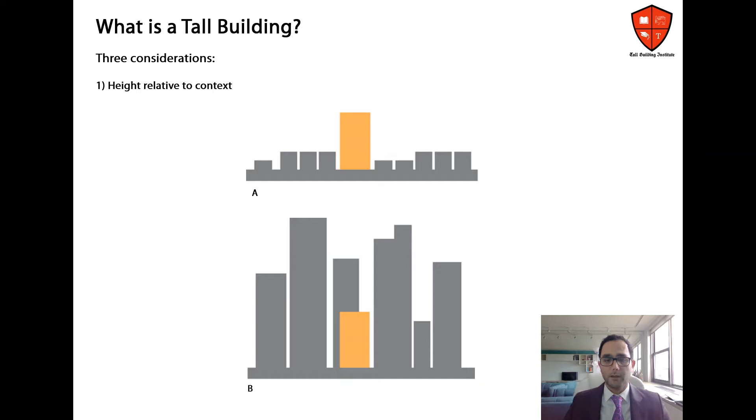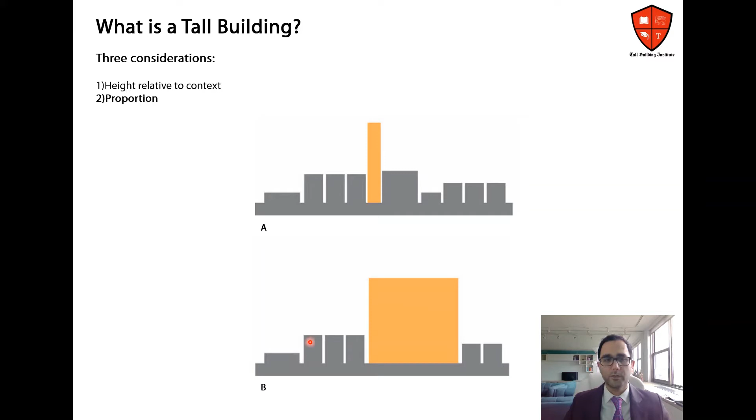The second is proportion. When you have a city like A, you look at the proportion of other buildings compared to your building - that's considered a tall building. Also in scenario B, when you look at the proportion of other buildings compared to your building, that's not considered a tall building.

The third one is tall building technologies - where you have new technologies, high speed elevators, or a new structural system, where technology has been adapted for that tall building.

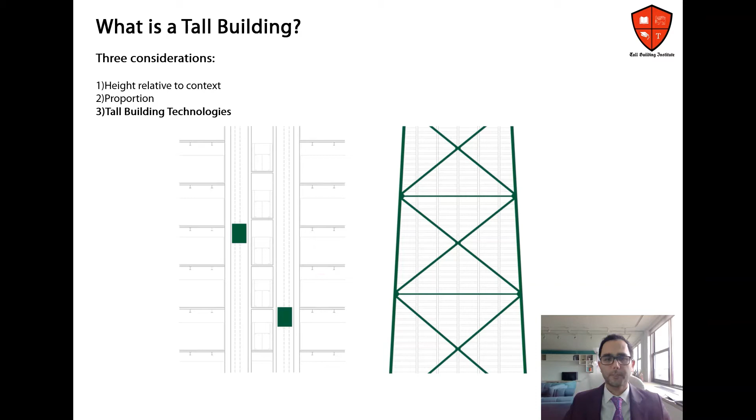Then we go to the higher level: what is a super tall building? I'm sure some of you may have heard people use different names and terminologies - tall buildings, super tall buildings, skyscrapers. Opinions on this differ internationally, although great heights are now being achieved with built tall buildings in excess of 800 meters or 2,600 feet.

At the start of 2010, there were only 42 buildings in excess of 300 meters completed and occupied globally. But now we have much more. As we move into the future, new technologies are achieving greater and greater heights.

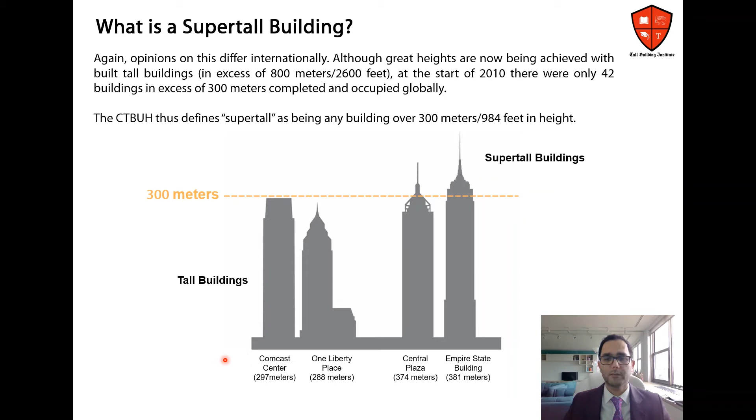Those are in New York City. The current tallest 10 buildings in the world, as of January 2022 - this data is from CTBUH again. As we see, the Burj Khalifa in Dubai is the tallest one at 828 meters, and also we have Taipei 101 in Taipei at 508 meters.

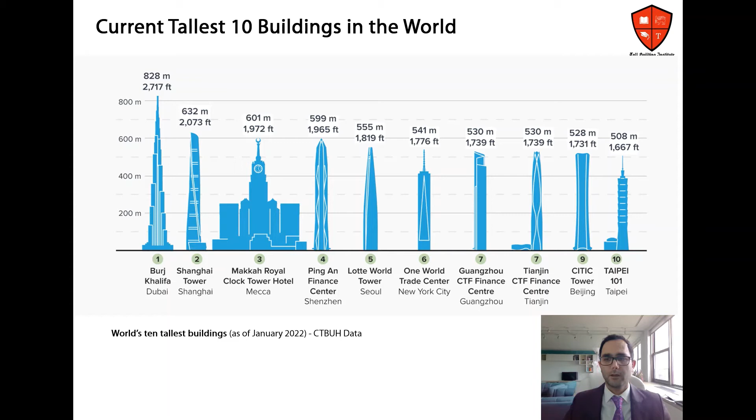Then we have different considerations for how to measure the height. One of them is height to architectural top. This is measured from the level of the lowest significant open air pedestrian entrance to the architectural top of the building, including the spire, but not including antenna, signage, flagpoles, or other functional technical equipment. This measurement is the most widely utilized and is employed by CTBUH to rank the world's tallest buildings.

As you can see here, again we look at the world's 10 tallest buildings, and Burj Khalifa, which is still the tallest one in the world - the architectural top height is 828 meters.

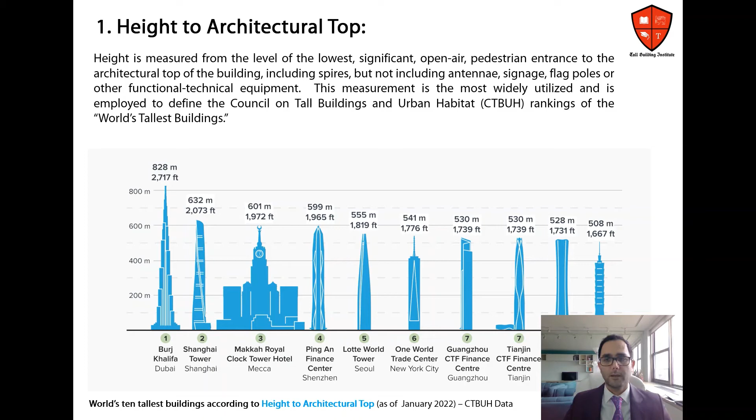And the second consideration is highest occupied floor. This is measured from the level of the lowest significant open air pedestrian entrance to the highest occupied floor within the building. For example, in Burj Khalifa, the highest occupied floor is at 585 meters, or 1921 feet.

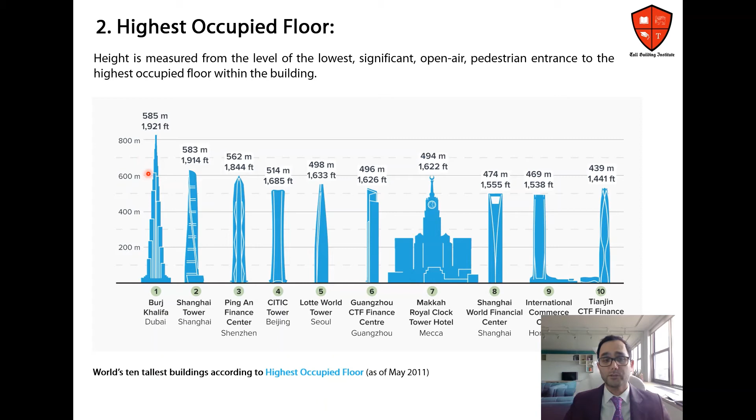The third consideration, height to the tip, is measured from the level of the lowest significant open air pedestrian entrance to the highest point of the building, irrespective of materials or function of the highest element, including antenna, flagpole, signage, and other functional technical equipment. So in this case we consider up to the top level. In Burj Khalifa's case, that is 830 meters, which is 2,723 feet - that's the highest level to the tip.

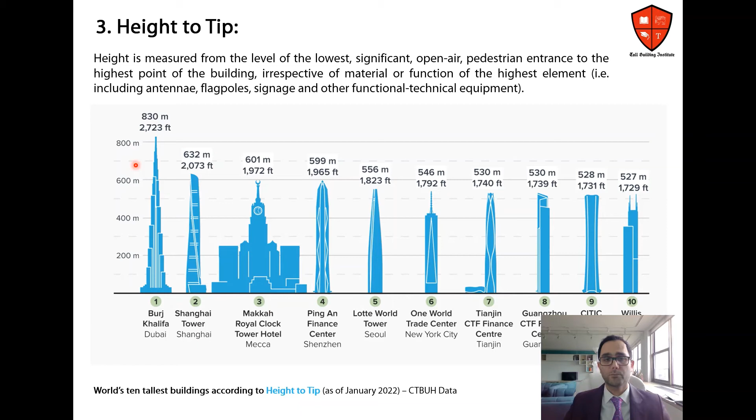An example I can give you: based on the official heights of Willis Tower compared to the Petronas Towers in Malaysia. Willis Tower is in Chicago, US. The height to the tip is 527 meters or 1,729 feet, but the architectural height is 442 meters, 1,451 feet, and the occupied level is 413 meters, which is 1,354 feet. For Petronas Towers in Malaysia, the architectural height is 452 meters, which is 1,483 feet, and the height to the tip is also 452, with the occupied level at 375 meters, which is 1,230 feet.

Tall building characteristics also include the function of the tall building: a single function versus mixed-use building. A single function tall building is defined as one where 85% or more of its total height is dedicated to a single function, versus a mixed-use tall building which contains two or more functions where each occupies a significant portion of the tower's total space. Support areas such as car parking and mechanical rooms or space do not constitute mixed-use functions.

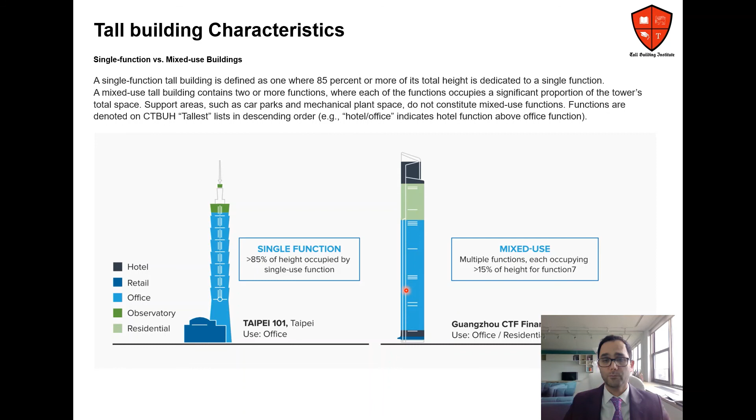Then in another scenario, we have building versus telecommunication or observation tower. How do we define these two - is it a tall building or a telecommunication tower? If more than 50% of the height is occupied, then we can consider it a building, but if less than 50% is occupied, then it's a telecommunication or observation tower.